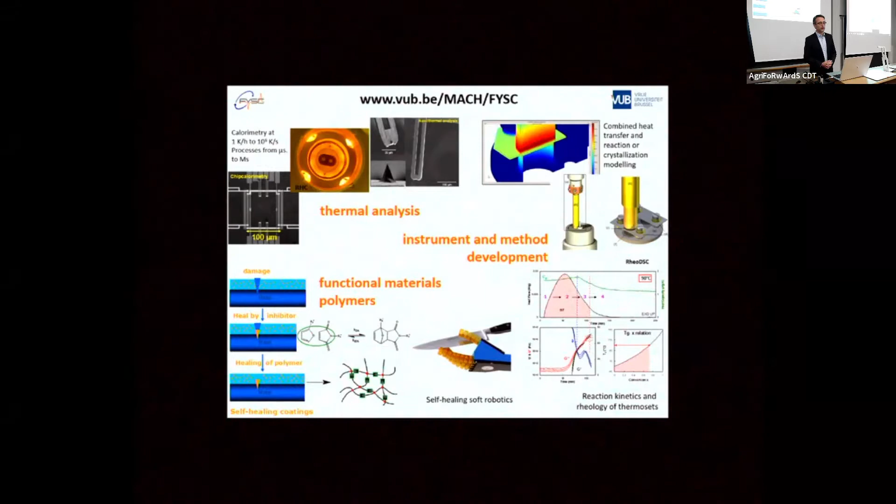For those people that attended here all the days and eventually previous training schools, I don't really need to introduce self-healing materials, but there may always be people online or here that haven't been at all these occasions. So very briefly, why are we even interested in developing self-healing materials?

Well, it's on this side today. Of course, when you are looking at materials, things like reliability, durability, safety, maintenance costs all come into play. It's not only about having the right mechanical, electrical, dielectrical properties and so on. And so when we have these materials, very often we can enhance them, we can make them better, we can have better properties, and maybe they'll survive as a result a bit longer. But at some point, damage is accumulating in these materials, and very often then they fail in a rather catastrophic way.

So from that viewpoint, self-healing materials started to be developed. Trying to go to materials that, when they undergo some damage, would be able to self-heal, that they would be able to recover their properties, that they would be able to heal local damages in the structure, and as a result that they would survive for a longer time.

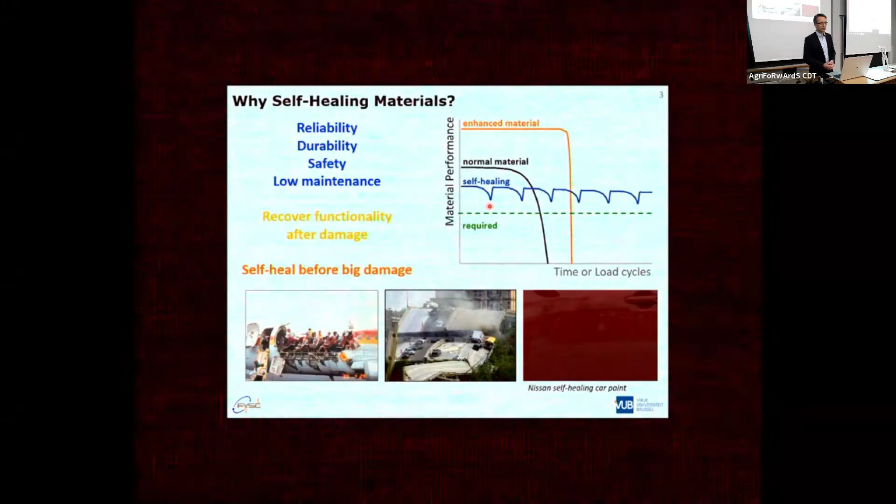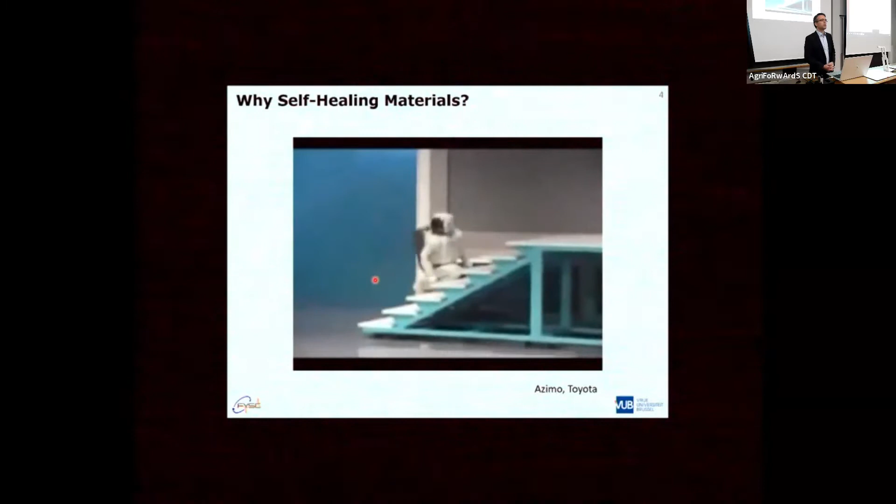Now, why self-healing in robotics? Well, because not always things go the way you planned them to go. Maybe Azimo didn't hurt himself too much this time when he dropped off the stairs. But if he repeats it and repeats it, there will be damage accumulating in systems, and at some point Azimo will no longer walk.

That's what we are interested in with self-healing materials: that we can heal this damage at an early stage and make sure these materials or systems keep working as they are intended.

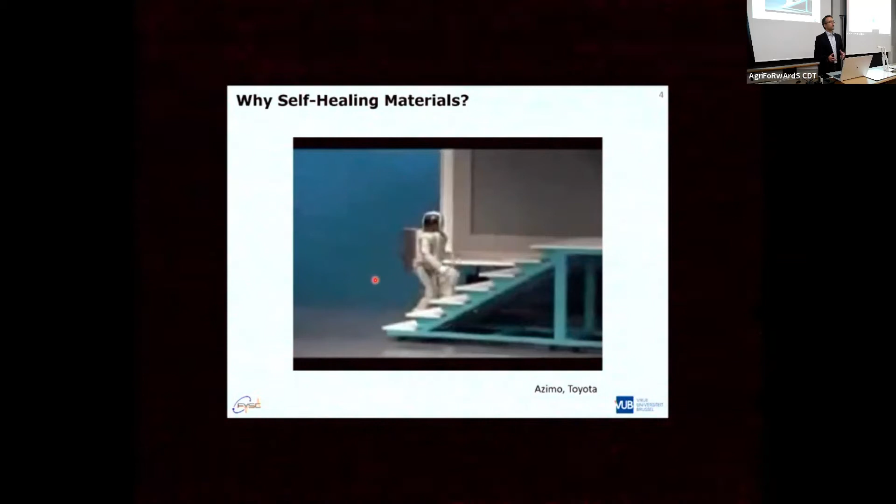Although we often show fingers that are completely being cut, it's a very nice demonstration. Maybe that's not the kind of damage we most urgently need to heal, not maybe what the most important target is, but it's a very nice way to convince people that indeed these materials are self-healing.

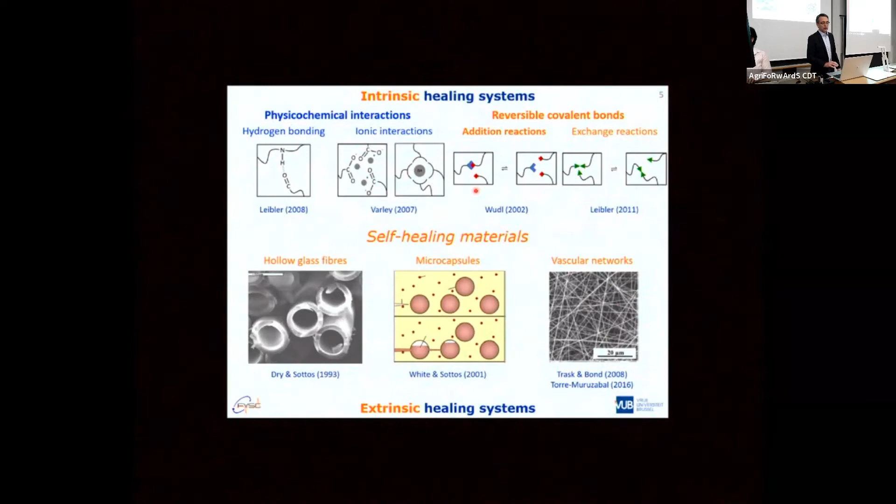There's a whole range of self-healing polymers. This slide has been shown on many other occasions, so I don't want to go into detail. What we are working on is systems that are dissociative, meaning they link at lower temperatures, and when you damage them, reversible bonds are broken and can be restored. So it's one type of self-healing materials, and that's the one we use.

Why do we use this one? Maybe not because I thought it would be the best material there would ever be to make a self-healing elastomer, but it's a material in which we combine chemical reactions with how changing conversions adapt properties, how the material changes with temperature and time as a result. So it's certainly a system where we could exploit the knowledge we already had in relation to reaction kinetics, modeling of reaction kinetics based on thermal analysis and so on.

So the principle of this system, as most of you are aware, is that we have thermal reversible networks with Diels-Alder adducts inside - bonds formed by Diels-Alder reaction between a furan and a maleimide group. Forming them is an exothermal reaction, meaning that when you start heating up these materials, this reaction equilibrium will shift to the unbound state. Not completely unbound immediately - it's an equilibrium that changes.

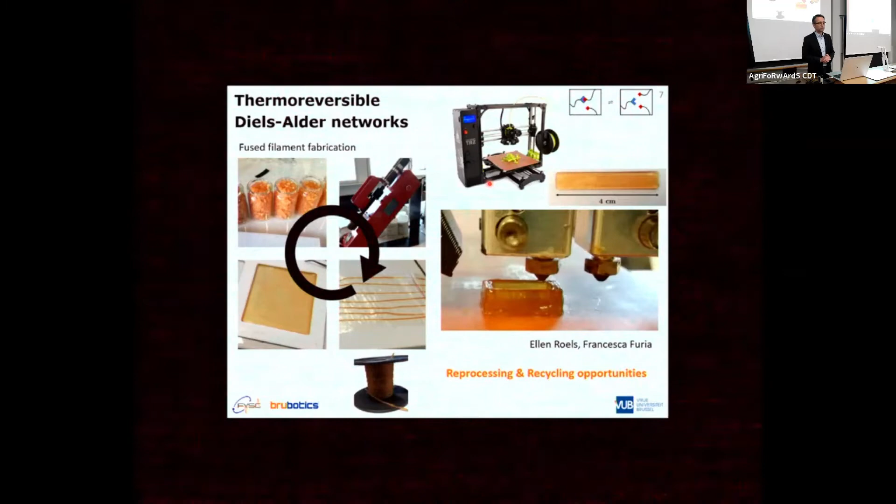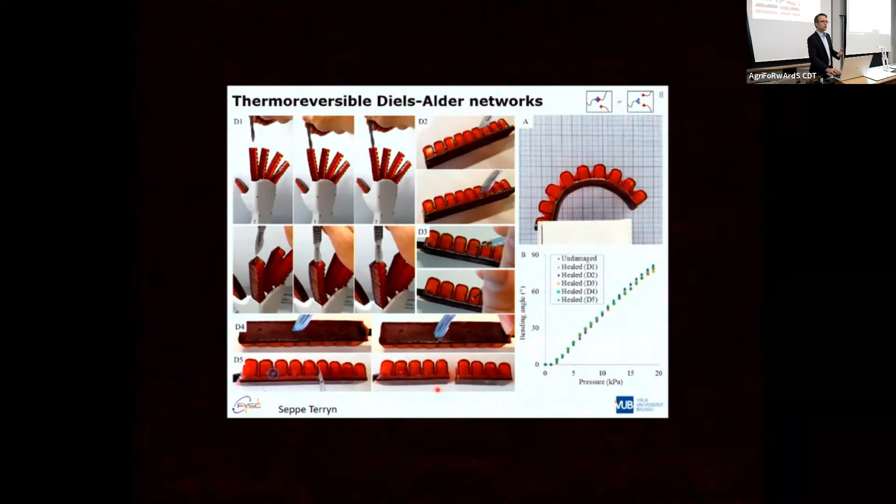Now, when you design these self-healing materials, but also when you test them and their healing capacity, there are a number of questions you should ask yourself. The first one is: what property are we actually interested in? Self-healing means you're healing the material with a certain target, so you might be healing mechanical properties, but there are certainly other options.

Then you want to heal something. That means that first you need to damage it. What type of damage is relevant? For the material, for the application that you are going to use the material in. Depending on the application that you use an elastomer in, you will have different types of damage. Of course, some of them will be more common, others will be maybe more application related.

When you want to introduce damage, you need to do it in a controlled way, because if every time the damage is different, there are of course statistical ways to start analyzing this, but things like tensile curves until failure, you don't want to do 1,000 times, because you have to mount these samples manually. If you have to do it 1,000 times for every material we design, then we definitely need many more PhD students than we have now. And we already have quite a few working on this topic.

And then, of course, once it's damaged, it's how do you measure the healing? How do you quantify it? You have different ways to do this, and some of them look very good on paper, but might not be so, or not be as performant as they seem when you look at it in real life.

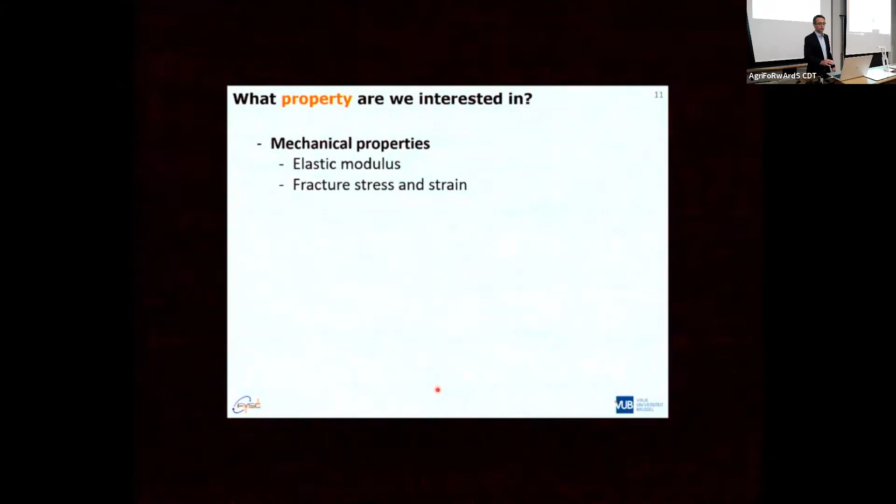But there are a lot of other properties that could be relevant. Could be a surface energy or a surface composition that is relevant. When you work on coatings, it's quite likely the corrosion protection that you are looking for. Electrical conductivity in other systems can be important. Once you go to sensors, for example, that becomes quite evident. So there are a lot of targets that we might be aiming for.

I, at some point, worked on printing plates, lithographic printing plates that you irradiate with a laser. And the first thing the company told us was, yeah, these are the irradiation conditions, and you should be able to get sufficient contrast between hydrophilic and hydrophobic regions to be able to print. About four years later, at the end of the project, there was a list of 13 other properties that were important for printing plates.

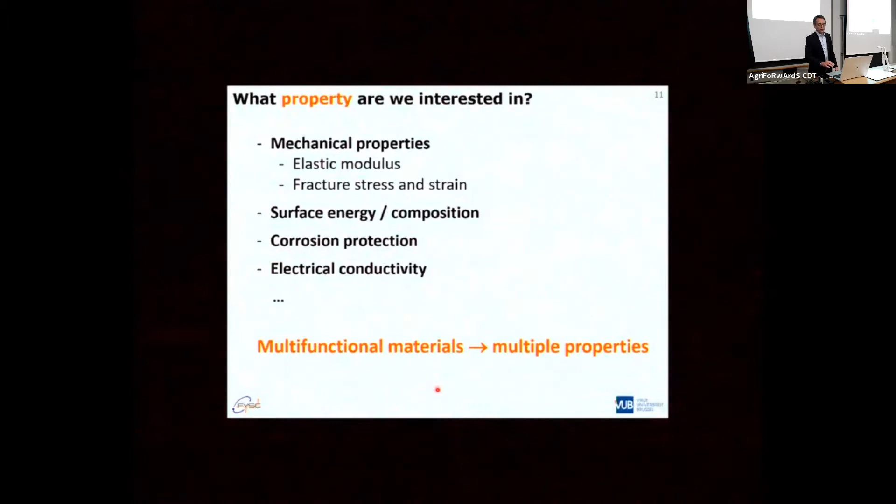It's never about one property that your material should meet. It's always about a combination of properties, even if you stay with very simple systems. But if we aim for multifunctional materials, then this only makes the target, or the number of targets, larger in number and more difficult to reach, because you will want to heal everything. If you have a sensor, you will want to heal its electrical properties, its electrical behavior, but also its mechanical behavior, and so on.

Now, to show you also other things than the systems that we worked on, I'll show you an example of surface properties - in this case, surface hydrophilicity. It's a material system that was developed at the Technical University of Eindhoven. So what they wanted to do - the problem that they had is that, okay, you have things like lenses for glasses, for example, and you might want to make them hydrophilic to make sure that if water droplets come on it, that the film spreads and that you don't have the diffraction of light on the small water droplets, and everything stays clear.

But of course, if you do that by something like a plasma treatment or a corona treatment, which you could use to make the surface of a hydrophobic material more hydrophilic, you have a very thin layer, nanometer thickness, that you actually change in composition, and that over time, through wear, will disappear. And then, of course, your function is gone. So what they wanted to do was make sure that you wouldn't only at the start have a hydrophilic layer on top of that material. What they did was anchor hydrophilic chains onto the network, making sure that when you expose it to water, spontaneously they will migrate.

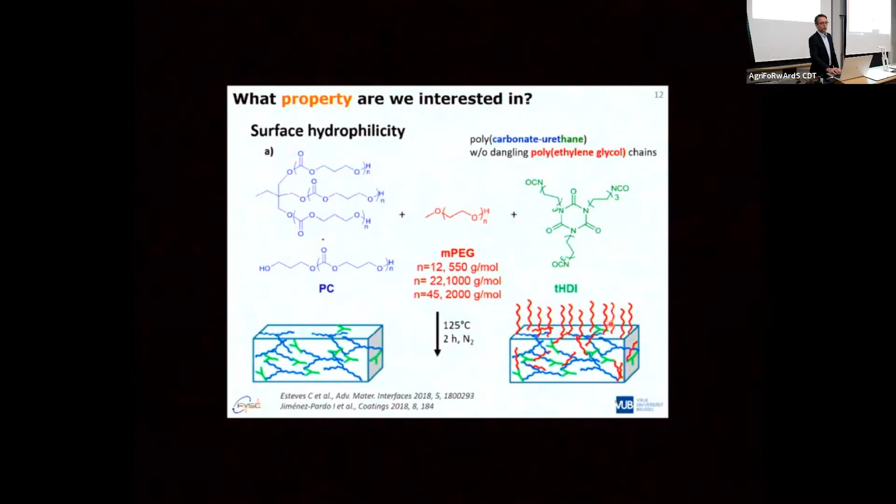The ones close to the surface will migrate to it and will make it hydrophilic. But of course, if that surface layer is removed, you want to make sure that it's replenished again, that new chains will come there, that you didn't just remove the dangling chains and hydrophobicity is there again. So they designed the material so that the length of the chains, the number of the chains were such that you have this surface replenishment. Whenever a surface layer is removed, new hydrophilic chains come up to the surface, and you retain that hydrophilic behavior that you were aiming for.

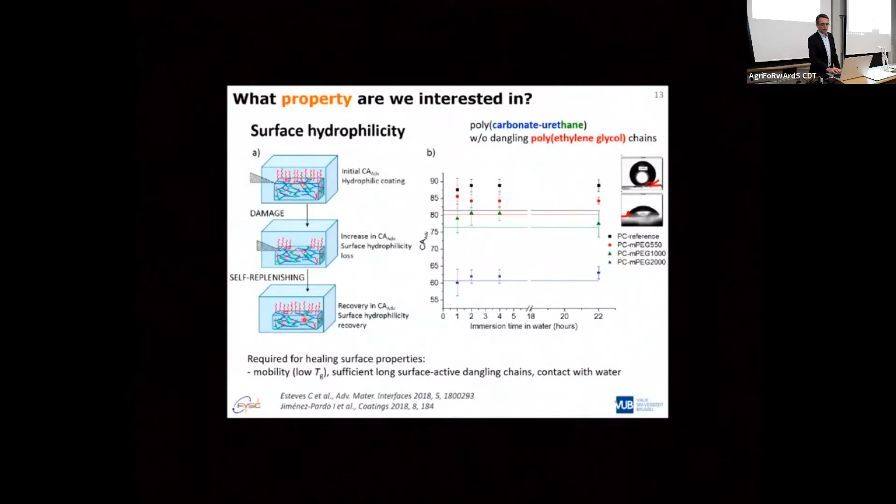We did some work on corrosion protection, although these are results from another group. They made a shape memory polymer, shape memory to be able to close a cut or a crack that you make into the material with a shape memory response. And they included microspheres with a healing agent to help this shape memory response, and with a corrosion inhibitor to make sure that, as long as that didn't happen yet, that your metal underneath stays corrosion protected.

This is a microscopic evaluation of self-healing. Something I didn't say, but of course, you also need to consider the scale at which you are going to study these healing processes. This is a very local way to do it. It means that you have to do it for quite a few of these damages to get a kind of statistical evaluation of what is really happening in these small local zones.

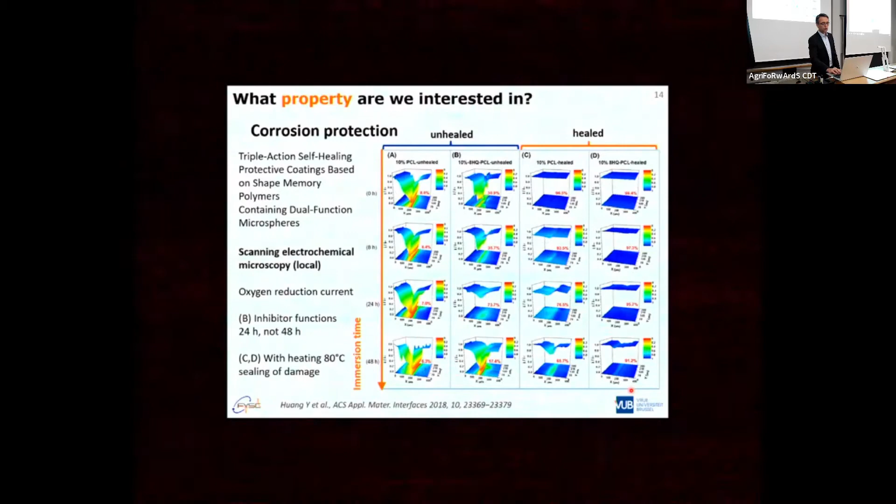But of course, you can also put multiple scratches on your surface and use electrochemical impedance spectroscopy, the macroscopic variant, to then study the corrosion behavior and indeed also observe in this case that you get quite nice corrosion protection with this triple healing system.

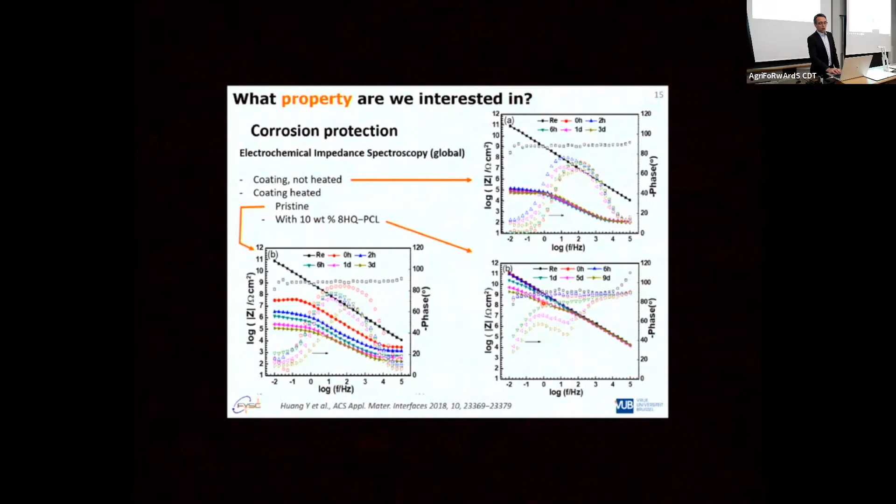Now, the next question is, how do we quantify it? Here, the answer could be that you look at the corrosion barrier properties of this layer and use this as a measure for self-healing, but you could also look at the crack and the crack depth and see how that gets sealed and take that as a measure. Or you could study the mechanical properties of this coating and use those as a measure for self-healing. So you will need to choose which property you would like to follow.

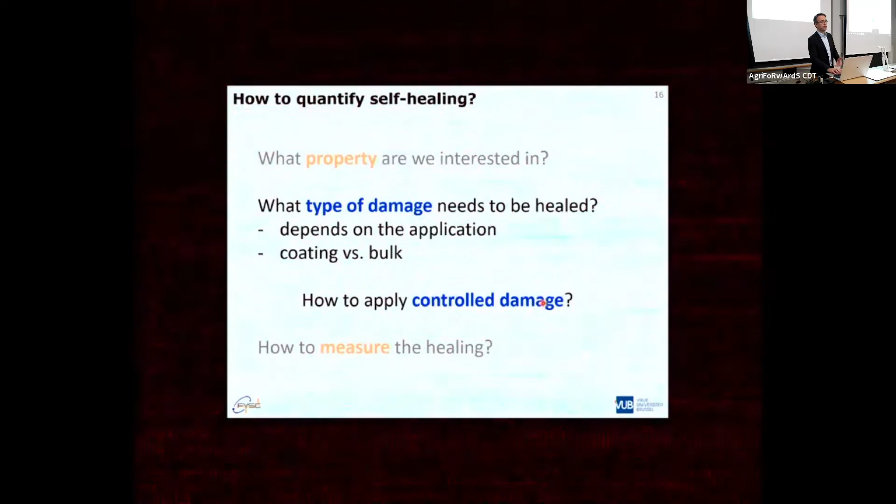And then you need to look at what kind of damage needs to be healed. That will depend on the application, and I will just highlight this with examples from coatings and from bulk. When you look at a coating, scratches are one of the most common kinds of failures. When you start applying them, you need to do this in a controlled way, so you will need to control the size of the scratches, the width, the depth. Are they going to the metal or not? Are they going through the oxide layer or another layer on the surface of the metal or not? All this will influence how the system behaves during healing and will influence the results you get.

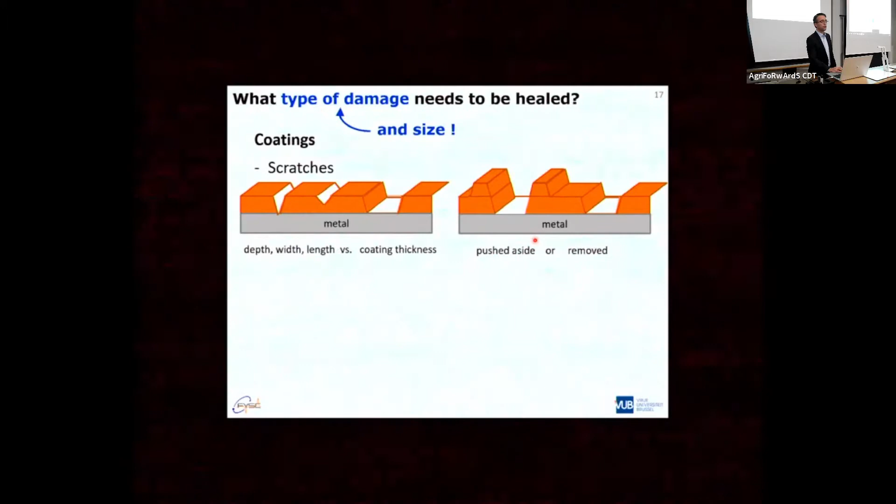But of course, these are not the only kinds of damage. You could also think of things like delamination happening as a result of maybe an impact, maybe bending, maybe a difference in thermal expansion coefficient between your metal and the coating on top of it. So for each material system, you will need to look at what is most important for that system and for the application in which it is going to be used.

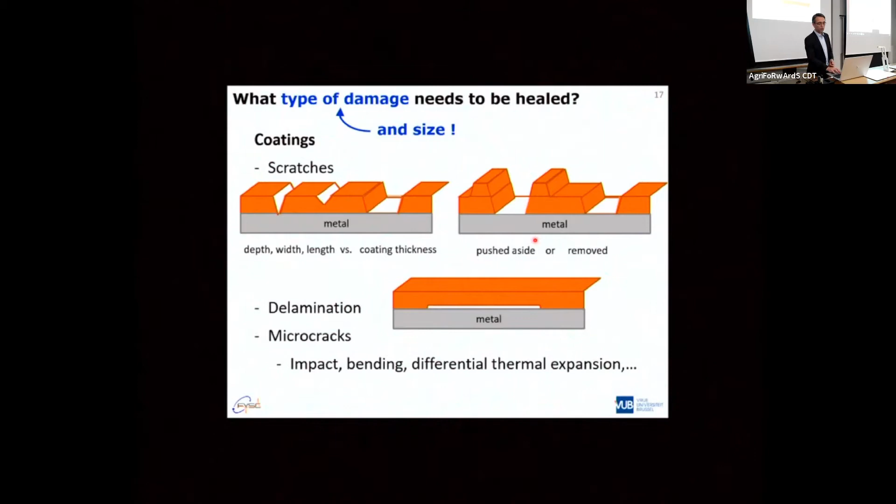You can make scratches in a controlled way. You can do that with nanolithography and then make the symbol of your university disappear. It's a very nice way to see it, but it's maybe not the most quantitative way to show that you have a self-sealing or a self-healing system in this case.

You can use scratch testers to apply controlled forces and, with a controlled speed, drag scratches through your material. That way you get a controlled kind of damage inside the material. But if you start comparing materials with the same settings of force and speed, you might not make the same kind of damage. So to study healing of the same type of damage across different materials, you will likely need to adjust the conditions under which that damage is made.

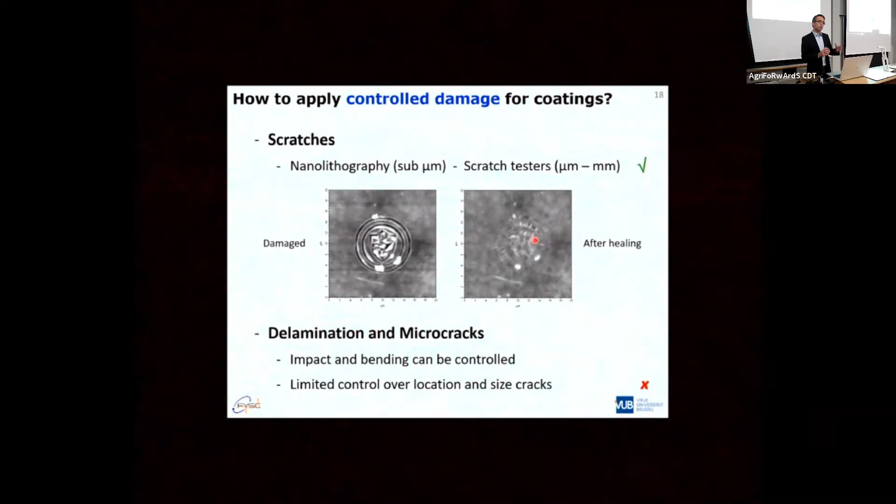For delamination and microcracks, typically things like impacts and bending tests can be done to create these damages, but they give you a limited amount of control over the location and size of the cracks. Still, it's a very controlled test — you can go to ASTM or ISO to look up the conditions under which to do it. So the source of the damage is the same, but the result will be very different from sample to sample, and certainly from material to material.

Now, from a robotics viewpoint, you might be more interested in bulk properties. Let me give an overview of a few different polymer systems that you could study.

If you go to thermosets — glassy thermosets at room temperature or application temperature — you get microcracks and crazing. These are the cracks you see appearing if you have a polystyrene or plexiglass box and you push too hard on it: it typically won't shatter into pieces immediately, but first these cracks will develop. You can induce these by mechanical loads close to the fracture limit, or by bending it up close to its bending fracture limit.

But you need to realize that when you do this on samples made in the lab, typically for fracture tests you do something like 10 samples to get a more or less relevant statistical average. And when you try to load a sample up to 80% of its average fracture stress, it's quite likely that quite some of your samples will fail during the test. So you're trying to induce a limited amount of damage, but in reality you might fracture quite a few of the samples you're trying to damage.

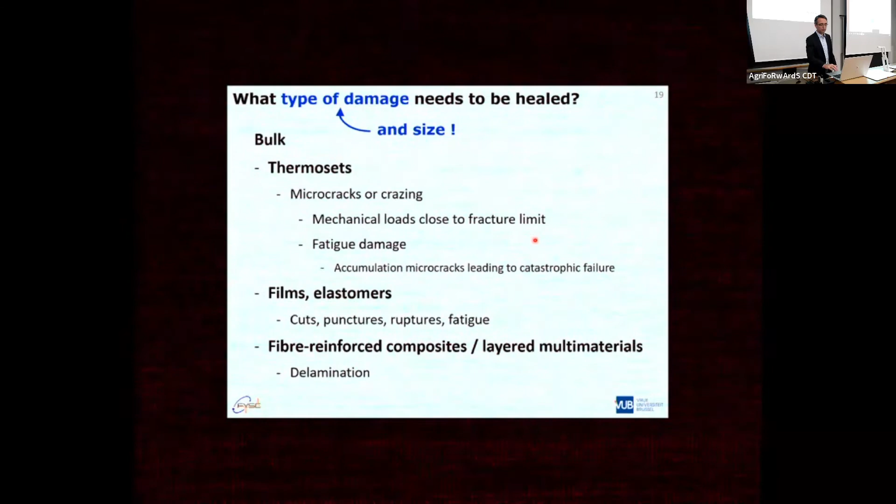What can you do? You can induce things like crazing by tension or by bending. You can always take the same radius of a bar, fold it over the same angle, and make sure you do it with a large enough number of samples to get reasonable averages or a reasonable statistical evaluation of what you're trying to do.

It's very difficult to quantify in the samples how many microcracks there are, where they're located, and what their size is. There are ways to do it — you can try having dyes migrate into the polymer and accumulate in the damage, then use imaging techniques to find out where they are located. But you can imagine that's not something you'd like to do in series for large numbers of samples.

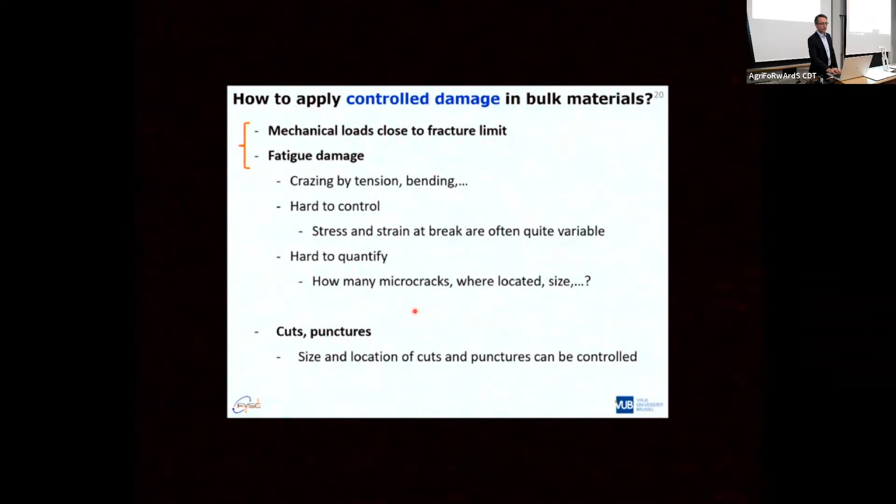For cuts and punctures, it's a bit easier. You can do what Seppe did: take the same type of scalpel every time, push it through the material, and if you do it with a controlled speed — if you really want to do it very nicely — you will make almost the same type of cut each time.

In that case, you can easily decide where you made the crack, because different parts of an actuator will undergo different levels of strain and stresses. So you will need to test the self-healing of an actuator for different places where you apply the damage.

For thermosets, things like the tapered double cantilever beam were developed, where through the design you make sure the stresses are located where you have a small cut into the material. Your crack tip will start there and then grow into the material as you do a tensile test. This was developed for thermosets, to study self-healing.

They not only worked with, for example, capsules that had healing agent coming out of them, but they even did things like just putting the healing agent into the crack plane, letting it heal for some time as a first test to see whether that kind of healing agent might work or not.

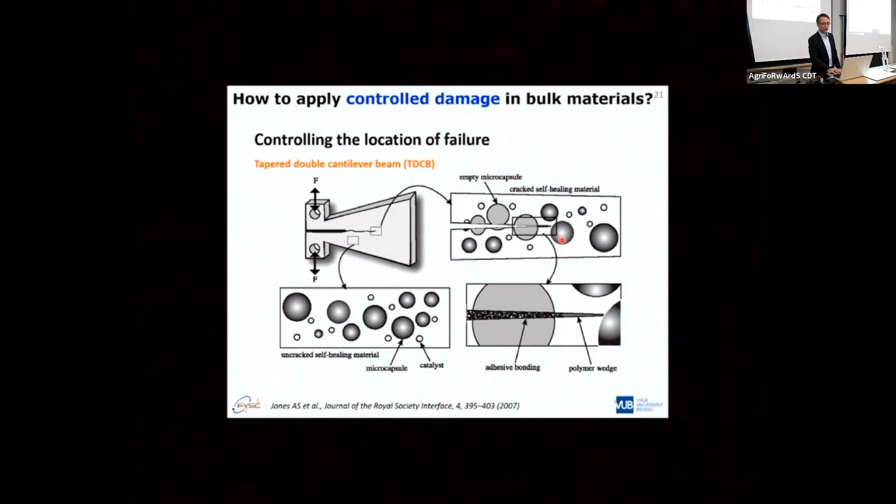So there are certainly different ways to approach this, but for the more glassy materials, this was a very nice test to do. I will show some curves recorded with it a bit later.

As I said, for the elastomeric systems on sheets or on small bars or on fingers and so on, you can easily cut and puncture them in a controlled way and test them.

When testing self-healing materials, very often we make these materials at a relatively small scale, usually larger than a typical polymer chemist would do, not a few grams, but maybe a few tens of grams - but often not a scale where you can make lots of actuators with them.

First we try to develop these materials, test them, and then when we think they are good, we try to turn them into actuators.

Then there is always the question of what is most relevant. When you test such an actuator, you might conclude that after a certain amount of healing time and heat under certain conditions, the actuator is fully healed - it shows exactly the same behavior. But I would say this is its functionality fully recovered.

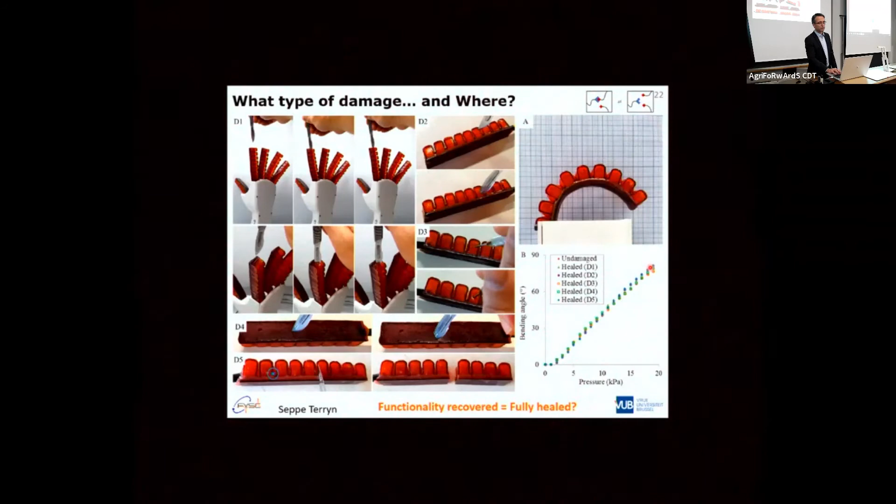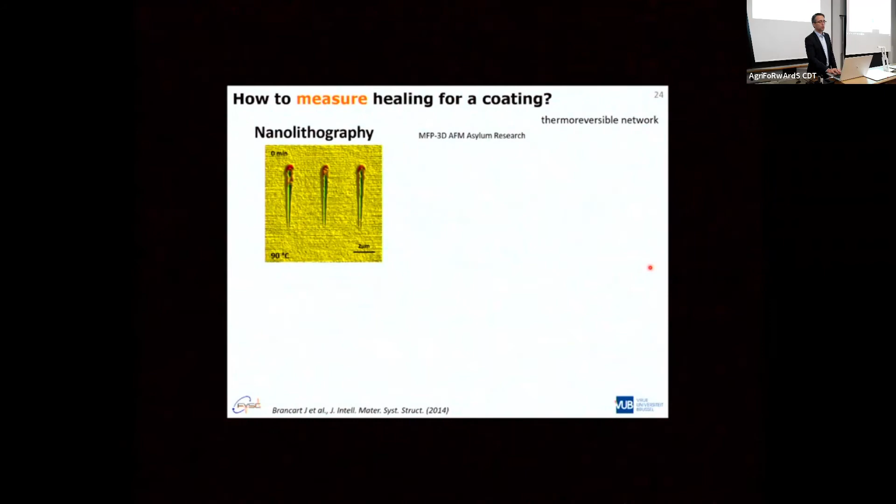How to quantify the healing, how to measure it. I mentioned that you could use nanolithography for scratching the material and then look at the healing of such scratches - you could measure their size, their depth, their volume, and quantify it.

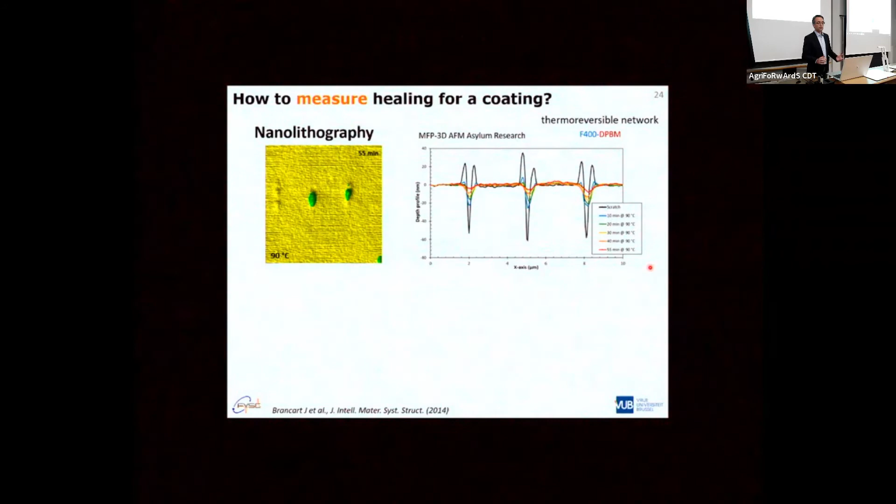That's what we did in these graphs. They date back quite some time, but nicely show that you can apply kinetic evaluations, or time constant evaluations, on this kind of healing behavior. Maybe this is more a sealing behavior than a healing behavior, because we show that the crack disappears - we don't show that the properties of the material go back to the same properties.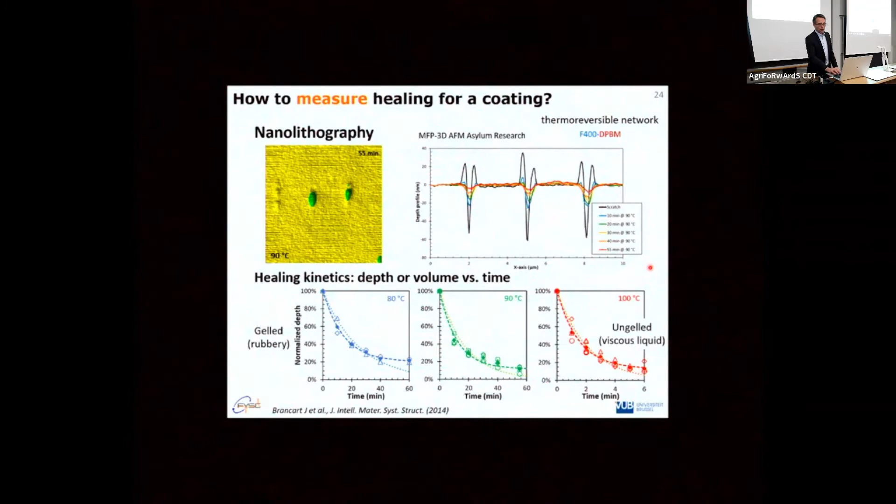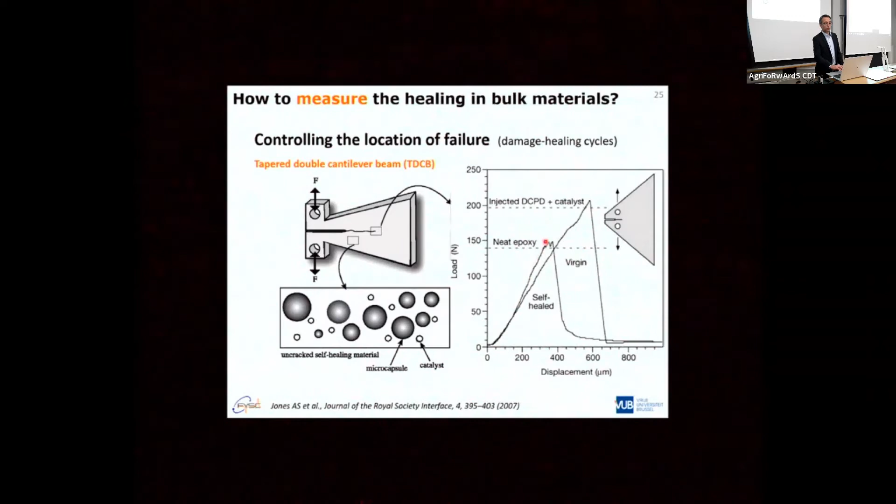In case of the tapered double cantilever beam, you get something like a tensile curve. You load a sample, you do it for a virgin material, you can do it for the self-healed material. You can quantify the mechanical response at small deformations.

You can quantify it for the maximum levels of load that you can apply, or maximum displacements that you can apply, or of course you can integrate the curve and go to things like toughness.

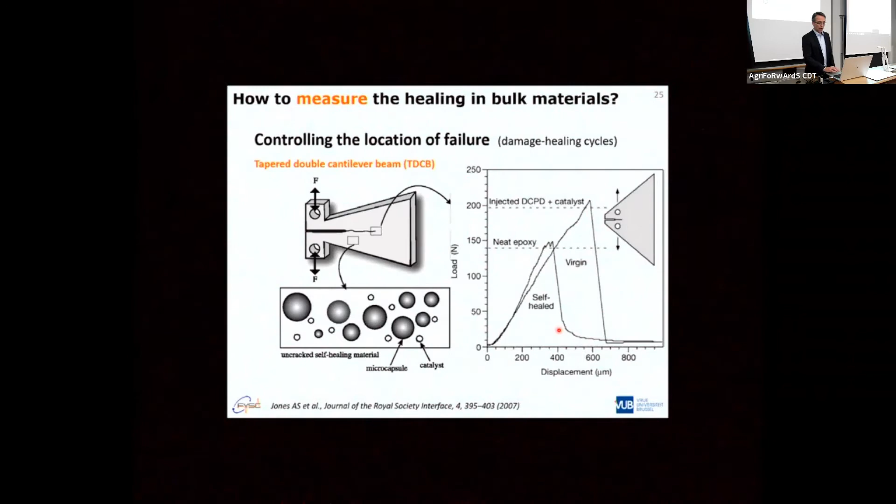All of these will give you different measures, different healing efficiencies. Even healing efficiency is not something generally defined, for which there is only one definition available. You can find papers where they define it as the property of the healed material divided by the property of the virgin material, but I will show you in a minute that that might not be the most sensitive way to do it.

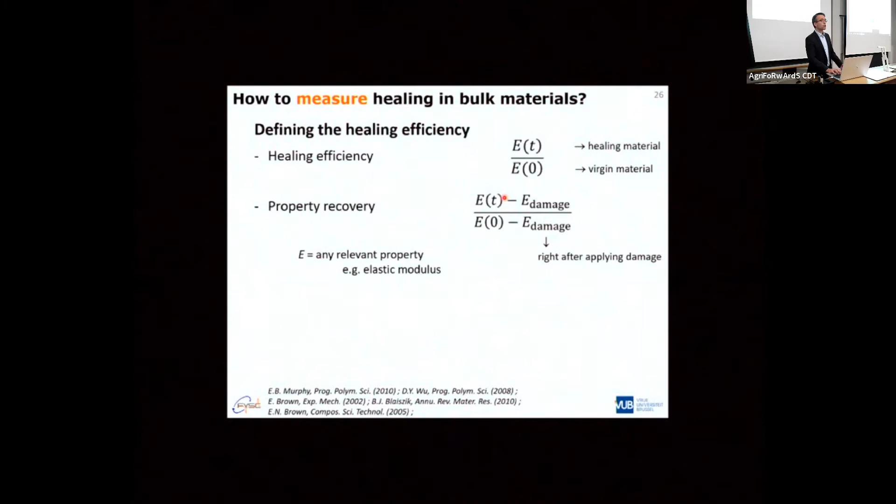We often use property recovery. That means you actually look at how you are healing the damage. You take the property - the difference between the property of the virgin material and the damaged material - and you see how that difference disappears over time or with the healing schedules you are applying. So this E could be a modulus, but it could also be corrosion barrier resistance or something like that.

That's an animation that I forgot to take out.

Now, if you consider measuring that healing, you could consider the following situation. You take a sample, a small testing bar, cut it in two, put it back together again, and heal it under certain conditions, with or without pressure, with or without temperature, and so on. Then we measure the modulus of that bar and compare it to the original modulus of the material.

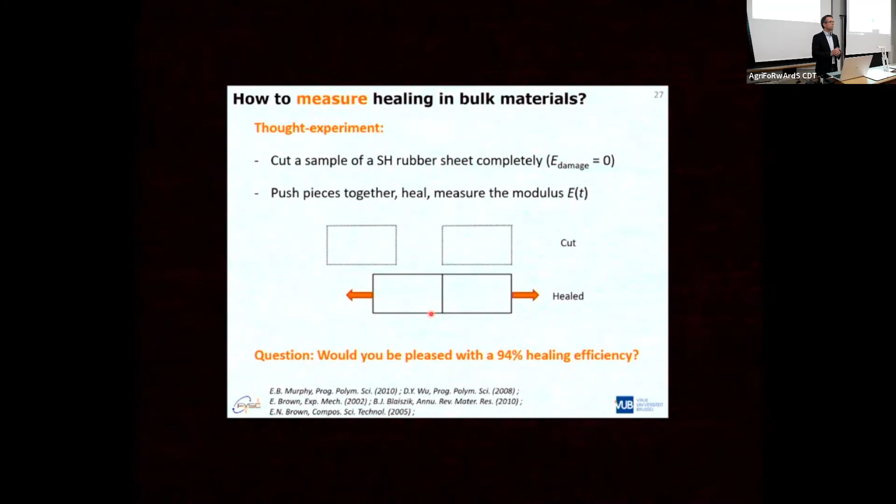Question is, would you be pleased with 94% healing efficiency? Defined in the way of the former slide, that means you recovered a modulus that has 94% of the value you originally had. Those of you not familiar with the question might think 94%, yeah, not too bad. But what does that actually mean?

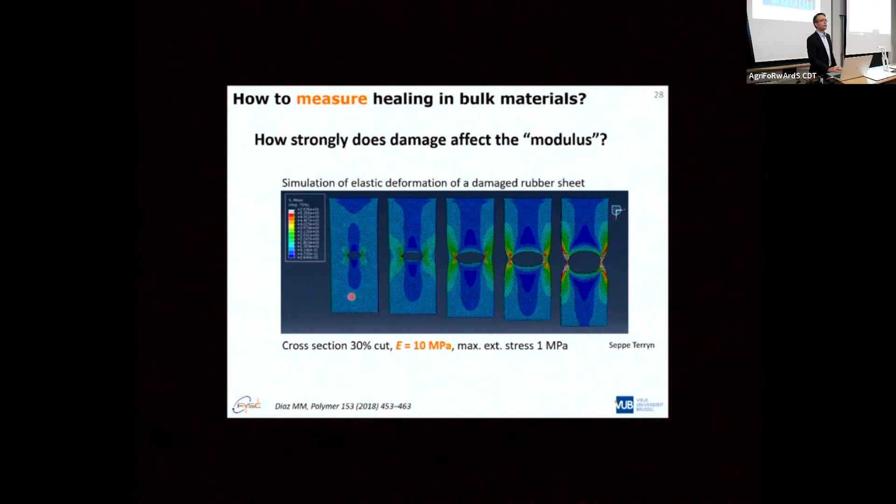Well, if you take a bar and cut it 30% in the middle, then apply a tensile loading, only there will you have a smaller cross-section, so only there will you have larger extensions. The rest of the material will be loaded and straining the same way as when it was not damaged. So the apparent modulus, or stiffness, of the damaged beam for a 30% cut is still 94% of its original value. That means when you put these two pieces together again, heal them, and get 94% of your original modulus, that 30% crack plane, your cut plane, is actually probably not even in contact, or at least not bound together. So the 94% healing looks very nice, but is not so nice.

Of course, if you start from this state, cutting it 30% or 80%, you start somewhere here, and then look at how that modulus recovers using the relative evaluation with respect to the property after the damage you applied, you get a much better measure of how your crack plane, your cut plane, is actually healing.

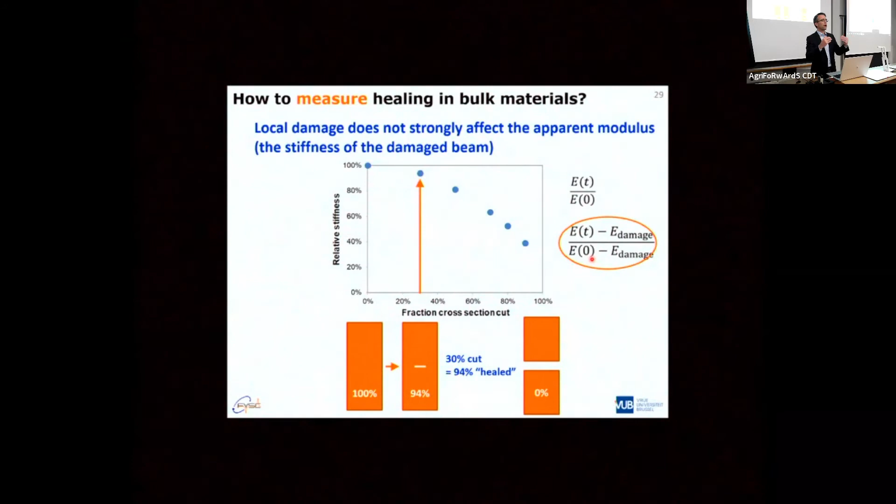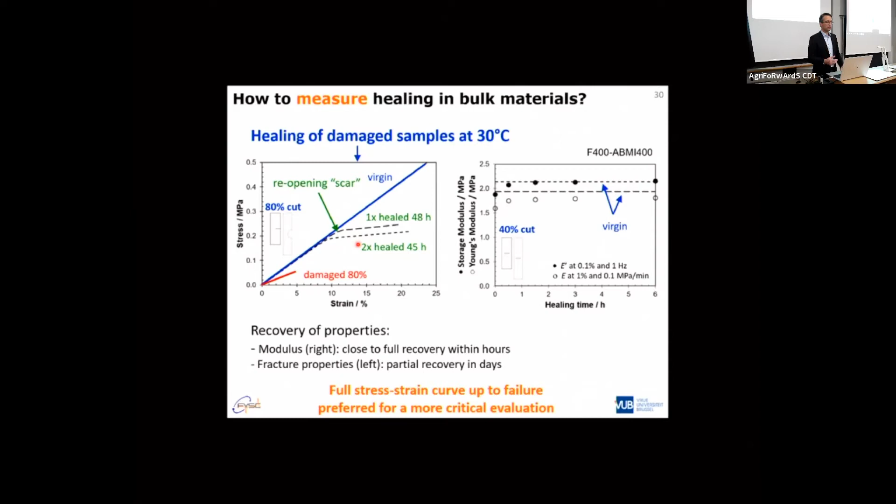So yes, if you use this system in an application where you only go to 5% strain, this is fine—it's healed for functionality, but it still takes a lot of time before it's fully healed. So certainly measuring stress strain curves up to failure gives you much more insight into the extent to which the material really healed.

And of course, all these properties give you a different measure of healing efficiency. You could use the modulus and get very nice values. You could use stresses or strains—they're already much lower. And if you use toughness, you see that we healed, in this case, something like 20% instead of 90% or more that we have for the modulus.

So be critical also when you see papers, when you review papers on these kinds of topics, be critical on what is being evaluated. And of course, it needs to be seen in the light of the application it's being designed for. Being critical just for being critical should never be the aim.

Okay, let me see, how am I doing in time?

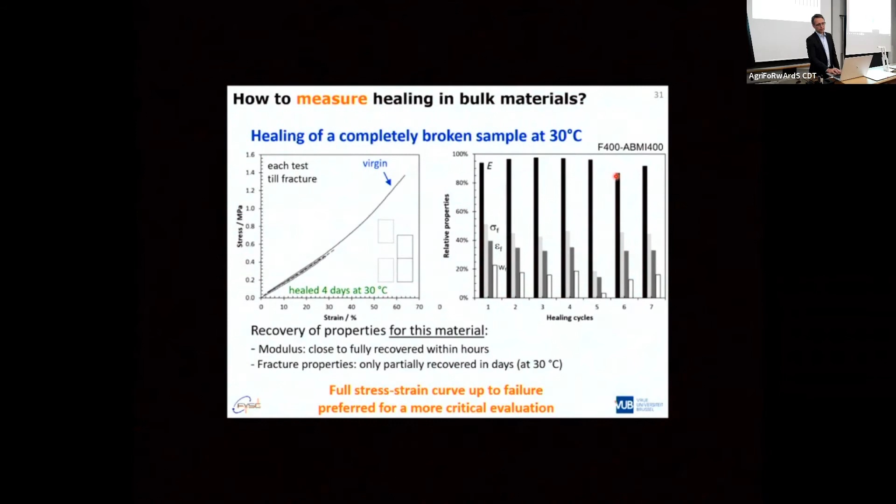When we look at our thermoreversible materials, kinetics is very important. What we are doing is breaking reversible bonds, and counting on chemical reactions to relink the material to recover the cross-linking we wanted. Chemical kinetics means there is a time scale involved in this.

If you heat up these materials very quickly, or maybe more importantly, if you cool them down too quickly, the chemical kinetics will not be able to follow, or will not be quick enough to make sure you stay in chemical equilibrium, and that after cooling you recover 90-95% of the reversible bonds in these materials.

If you cool it too quickly - say 10 degrees per minute, which is not that fast - it will bring you to 60% conversion, and then you will need time at room temperature, where the reactions are even slower, to make sure it recovers to 90%.

If that 60% is good enough to give you the functional recovery of your actuator, that might be fine, but certainly it will not yet behave in the same way as a system that is fully recovered. The cross-linking density is something like 60% of what it can be at the end, so even the modulus will not yet be the same.

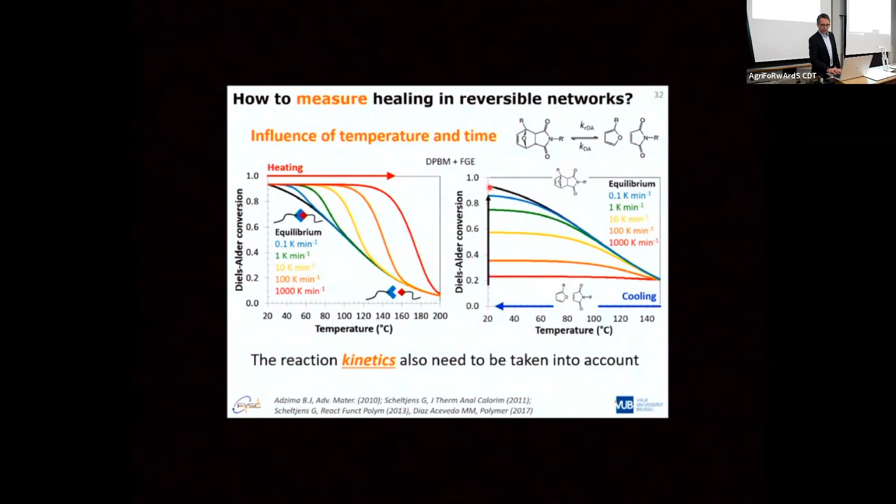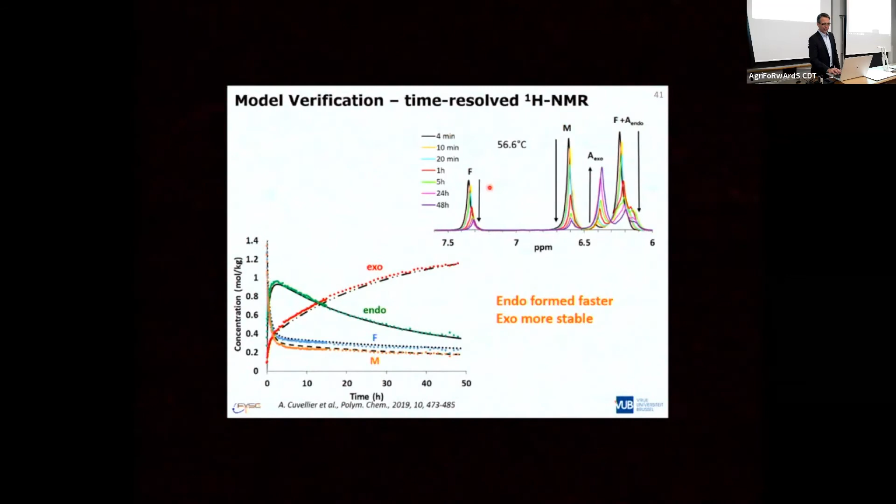I will skip the study of the chemical kinetics. I always put it in because I always hope that I can show some of these, but I will skip those in order to still be able to take some questions.

What you do need to be aware of is that reaction kinetics, but also things like crystallization kinetics or reorganization kinetics or diffusion kinetics - if you work with a healing system based on the release of a solvent or a plasticizer that then plasticizes the material and aids the shape memory response - you need to take into account these timescales when you think of the healing.

That's actually why these reversible Diels-Alder systems were kind of put into the bin at an early stage, because many people didn't take into account the chemical kinetics. Then you test the material that is only partially cross-linked again, and it will not have the same properties - probably much worse mechanical properties than the fully recovered material.

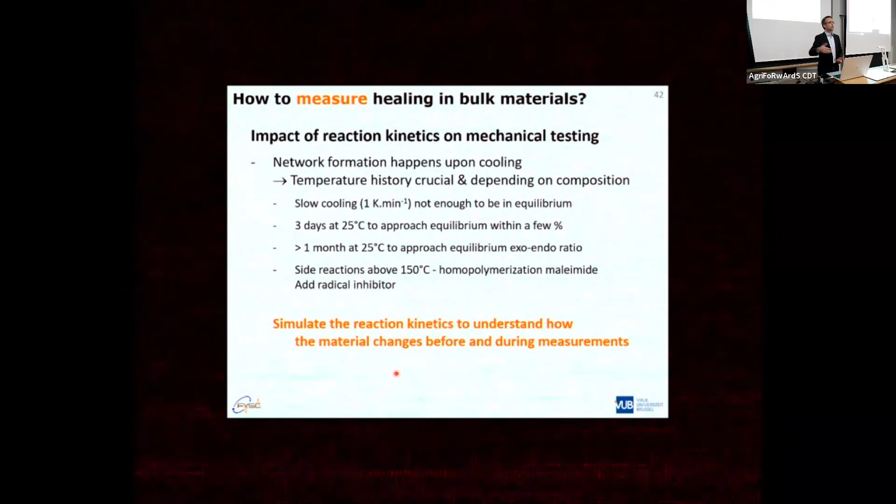So if you are working with reaction systems, try to get the kinetics, simulate them, not only to know how long you should let it heal, but also to know how during your experiments, during storage, as a function of environmental temperatures, your material might be changing.

In our case, there is a very important effect of temperature on the healing conditions. We talked about damage and so on, but of course there's also healing time and temperature and cooling rates that will be important. In our case, the gel temperature is a very important one.

When you go above the gel temperature, the material will start flowing. Then it's easy to close large cracks and so on, but for an actuator that's not what you want. Accidentally, sometimes the furnace goes a little bit out of control, your temperature goes 10 degrees above the intended temperature, and your actuator flows away - you get a puddle of elastomer rather than a nice bending actuator.

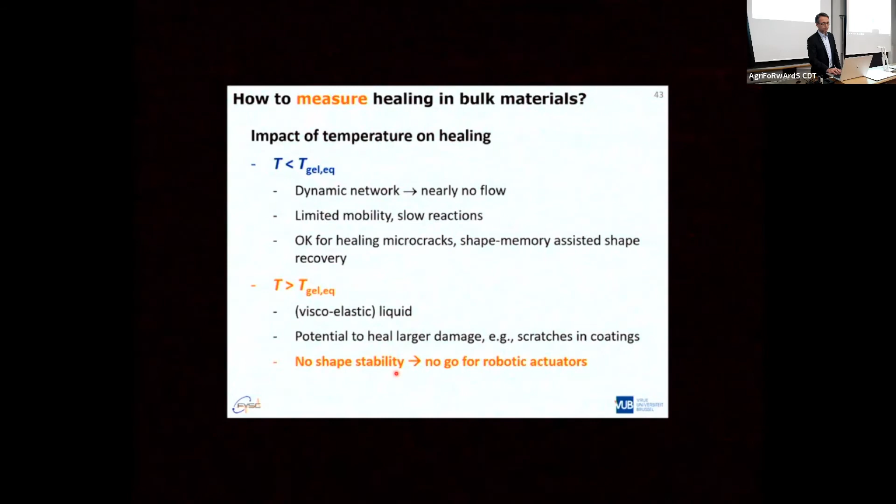So also these properties you will need to measure, to know in which conditions the healing should be done.

But in the end, for the robotics guys, the functional recovery is maybe the most important. You should take into account maximum operating pressures and so on, so that you don't limit the range of operation that you can use for your system by healing it in the wrong conditions.

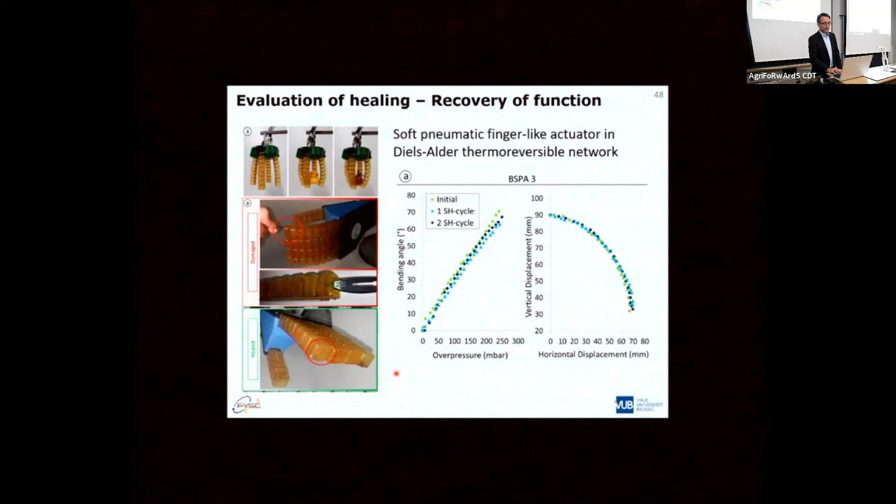And then, of course, you need to test this for different kinds of damage. Don't only damage it in the easy places - also damage it in the zones of high stresses and high strains, to get the more critical values.

For some applications, you may need an immediate recovery. It's clear that with our systems, in which slow kinetics are involved, it is not healing immediately, but that is not always the most critical aspect.

You might think, I want to heal the damage right away. And of course, if you have very large damage, that is very interesting, because you can put a finger back on and immediately start using it again. That would be very nice.

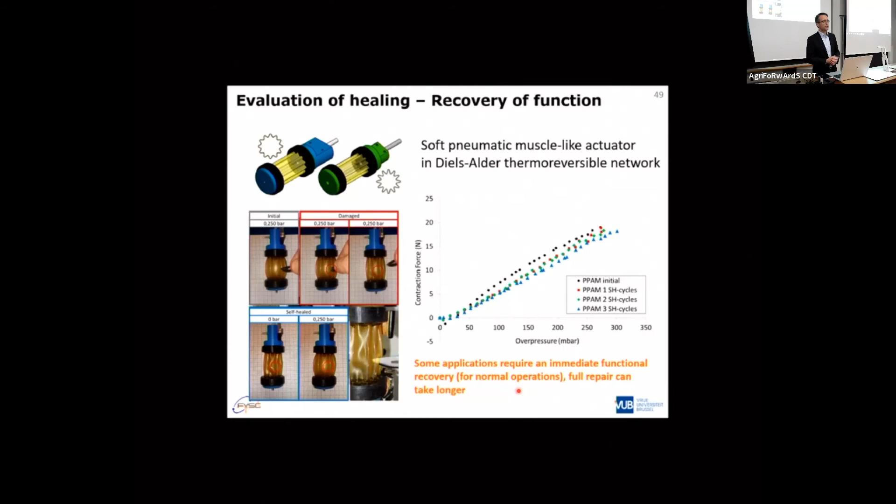But if you go back to Asimo and the stair problem - if he drops off the stairs and the head drops off, then you will need to repair it immediately if you want to make it function again. But most likely you created local damage that you might not need to heal right away, and it might not matter whether it takes a day or a few days before it is healed, because I hope you will not make him drop off the stairs continuously.

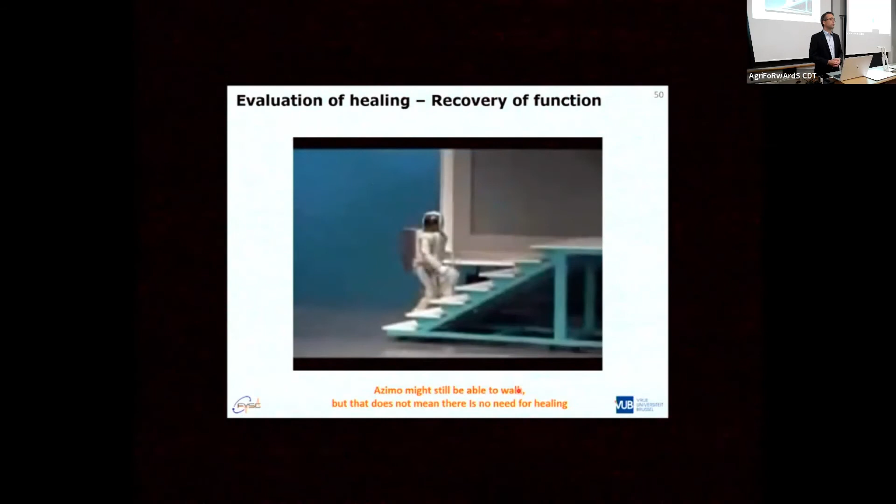So let me close with an overview of questions. When you look at healing, consider all the properties that you might want to heal at an early stage, because if you design or select these materials, you'd better take enough properties into account to avoid having to redo everything later on.

Consider the types of damage. That means you might need to consider the type of application you're aiming for at an early stage, because the application might actually decide what kind of damage is most relevant.

Consider how to create damage in a controlled way, and if you cannot do that, consider how to statistically evaluate it to make sure you get the right measures when quantifying it. You can quantify it locally or globally. You can consider different healing conditions, and also there the relevant ones should be chosen.

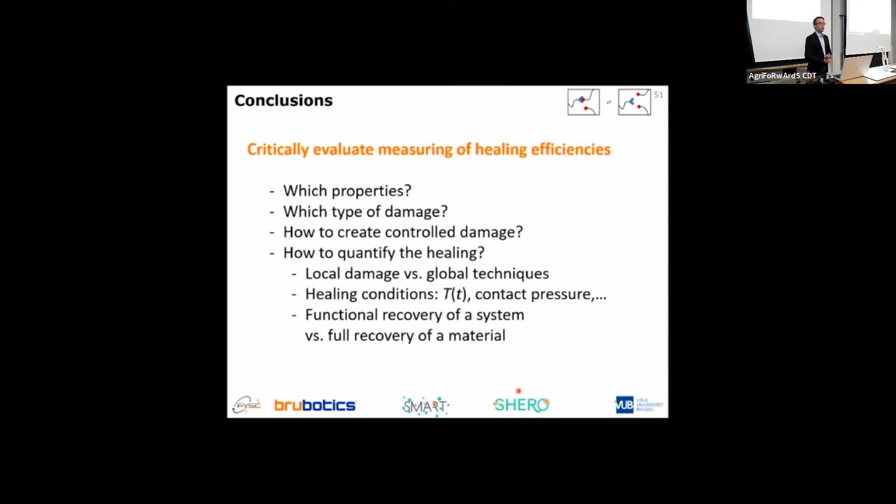You might not want to put a robot with a lot of electronics for half a day at 90 degrees, because your electronics might not survive it, although our materials might—they might recover. You might want to consider at an early stage whether you're aiming for functional recovery of your system or full recovery of your material.

With that, I would like to thank everyone who contributed. The people mentioned here by name were involved in this at an early stage. There are many other people involved in this work these days, but since I had to construct a presentation on short notice out of my own material, I used mostly results that have been there for some time.

I would like to thank Bram also and the people from the robotics group for a very nice collaboration, because robotics is a very nice demonstrator system for showing how this kind of material works. It gives us very nice targets to aim for when designing materials, because that's what we like to do—designing materials to reach certain properties, certain behaviors.

And of course, I would like to thank all our partners and collaborators in the Smart and SHERO projects for a very nice collaboration. Although Corona intervened, there were a lot of long-distance contacts, but nevertheless very fruitful contacts and collaborations. It's very nice to finally be able to see all of you here live. Thank you.